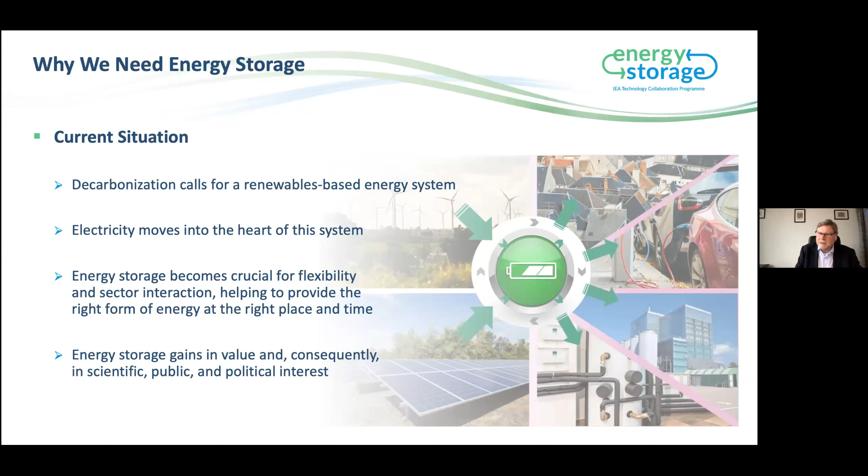We also see a higher level of interaction between the various sectors. We have to be sure that we place the right form of energy at the right place and time. Again, look at how heating and mobility have an impact on these changing profiles. And in this whole perspective, energy storage gains in value, economic value, but also value to make the overall energy system more reliable, more precise, and, let's say, safer in the future. And of course, these developments create public interest, also from a political point of view.

If you look at how these changes take shape, in the past, in the small circle where production and consumption were connected directly, if we needed more energy in whatever form, in our previous fossil fuel based energy system, we could just increase our production rate and tune that to the consumption.

With the introduction of renewables, decentral and central, there's a whole new spectrum. We have wind, hydro, large solar, bioenergy, all these renewable energy forms, and what we call prosumerfication: producing renewables at the same location where you can use them, but maybe not at the same time. So energy storage takes shape. And of course, there's a lot of data involved in order to connect these, and it works within a new and intelligent grid environment.

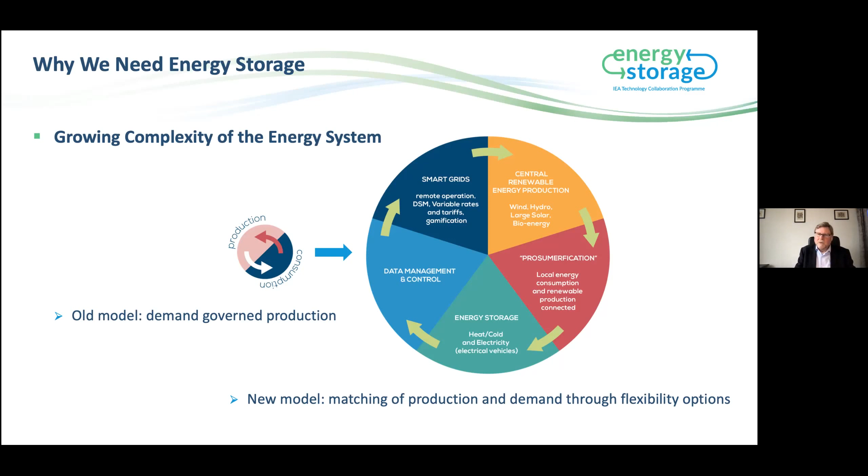These changes in the energy system require a totally new approach to make steps forward, and require far more flexibility. So from an old model where we have a constant supply meeting the various demand profiles, we change to a fluctuating supply from renewable sources. And at the same time, when we also have changes in our demand profiles, storage and flexibility become extremely important in order to balance the whole system and to make sure that we provide energy at the right time, at the right place, in the right shape and in the right capacity. These kinds of changes definitely will not be possible without more flexibility and more energy storage.

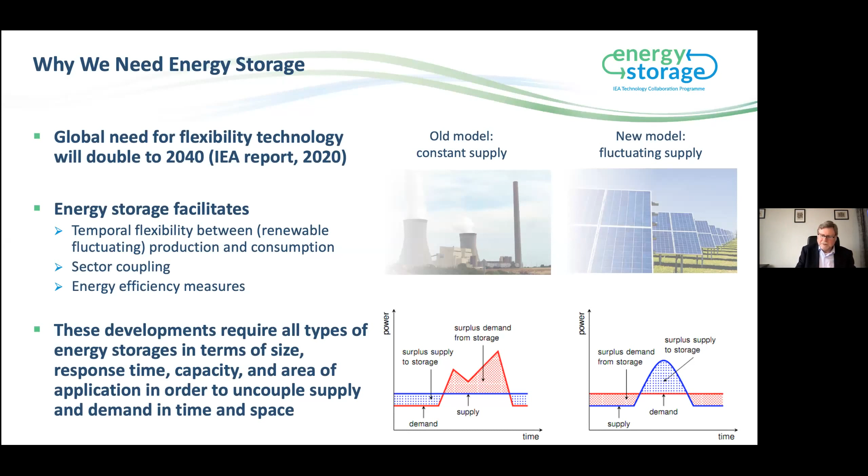I mentioned already the interaction between the sectors. That is a very important element now if you look at the entire system. It is not one-to-one that we can provide energy to a certain application, like mobility or like heating or like industrial process energy. We see far more interdependency occurring between fossil fuels replaced by renewables, where, for instance, electricity can be used both for mobility or for heating or for your normal electricity production or consumption in the industry or in your home.

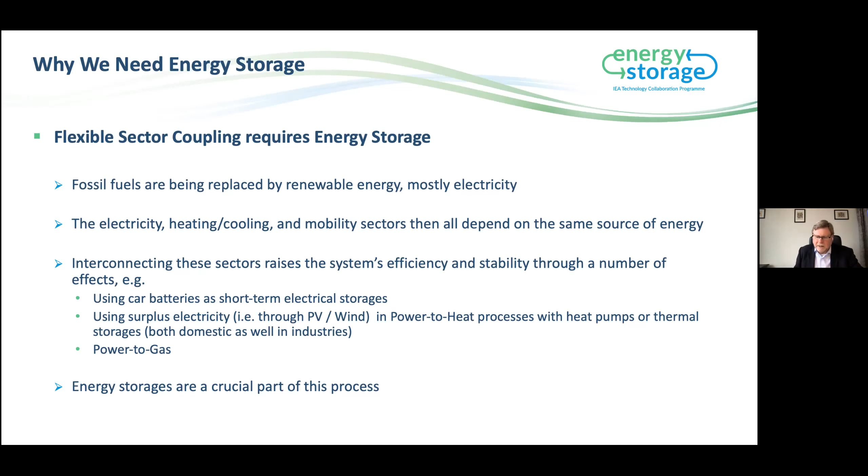At the same time, we can produce locally. All these various changes and the coupling of the various demand sectors requires energy storage as an intermediate enabling technology in order to meet these changing load profiles in the various sectors. And that's why energy storage becomes a very crucial part in any new process.

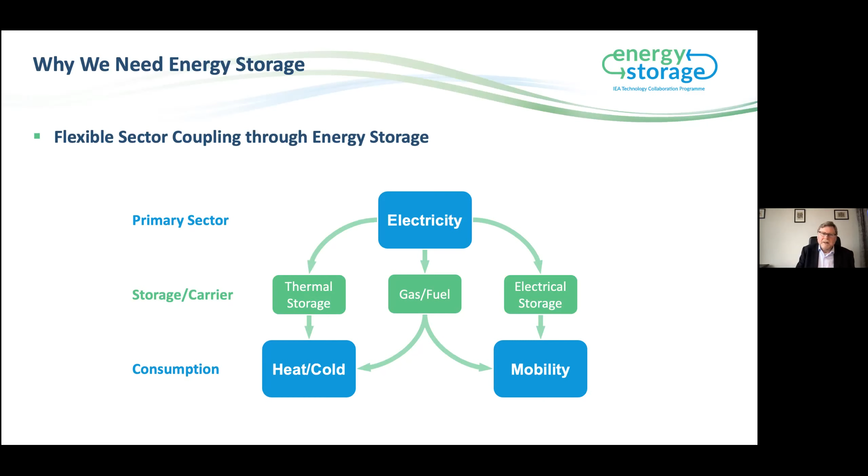So basically, the flexible sector coupling with storage requires that electricity, if we see that as the main commodity for a lot of the new processes, can go through either thermal storage and then be used for heat and cold, or directly, of course. And the same goes for mobility. And gas fuel from electricity, the so-called power to molecules or power to gas route, may also be supporting the consumption patterns in mobility and heat and cold. This is just an example how this can develop and need energy storage as an intermediate technology to make that happen.

Finally, the politics and the policy needed to encourage the use of storage is also internationally growing. There is an understanding which hasn't been there for a long period that energy storage is and needs to be taken into account in order to make the transition to a new energy system based on renewables. That is an important consideration, because if the politics and the regulation connected to the politics don't take that into account, we still see that the value of energy storage will be too limited.

And that brings us to the point that economics are very important. The economic value of energy storage depends, of course, on the application it's being used in, but it is definitely increasing at the moment. For instance, if you want to produce more variable renewables and bring that to your consumer profiles, you can do that by increasing your electricity infrastructure, or by avoiding that through the use of storage. It is a very economically interesting aspect.

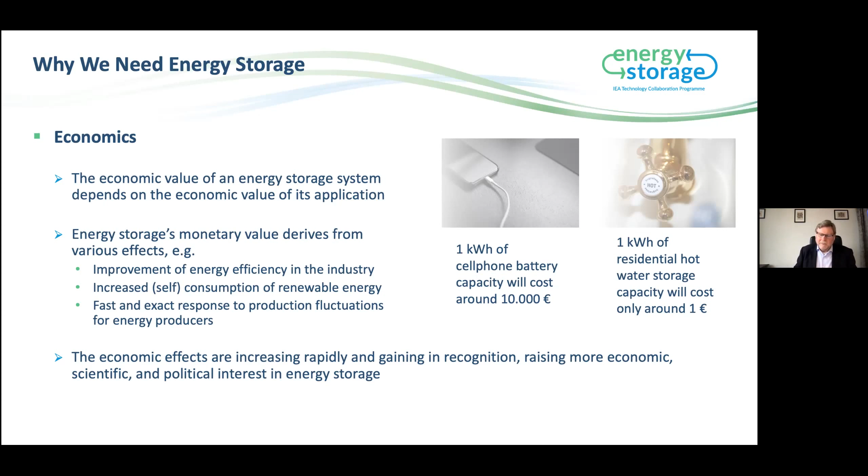Well, if we look at the essentials of energy storage, storage is just a very basic charging, storing, discharging cycle. A process where we include the time parameter into the direct normal production to consumer level. By introducing storage, you can change the time frame of the production to the load. That is the essence of storage. And charging and discharging in a certain cycle is a major part of the storage principles.

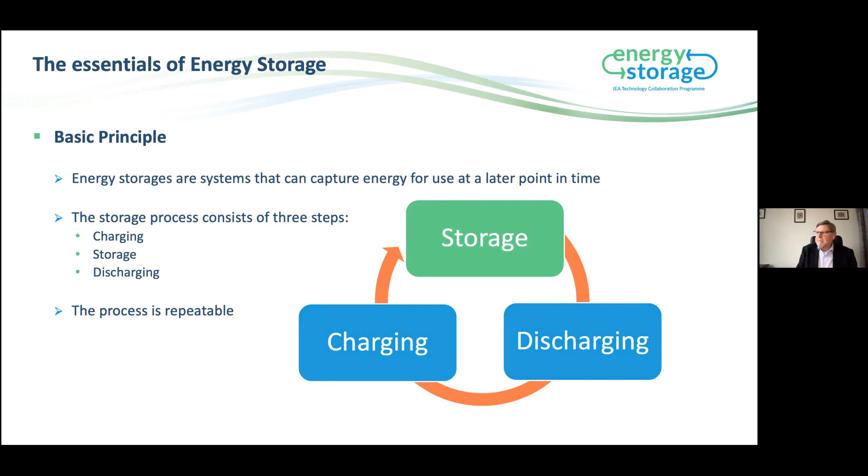So you have to look also, with storage, at the physical parameters. There's a need for storage in many forms, in many shapes. In terms of the capacity, what do you actually require? What is the time span in using the storage? Is that a year? Is that a second? Or is that a month? Or an hour? Or a day? That fully depends on the kind of application, and also on the kind of commodity you'd like to store. The desired charging and discharging capacity, how fast it should go, should be fine-tuned to the certain load you want to achieve.

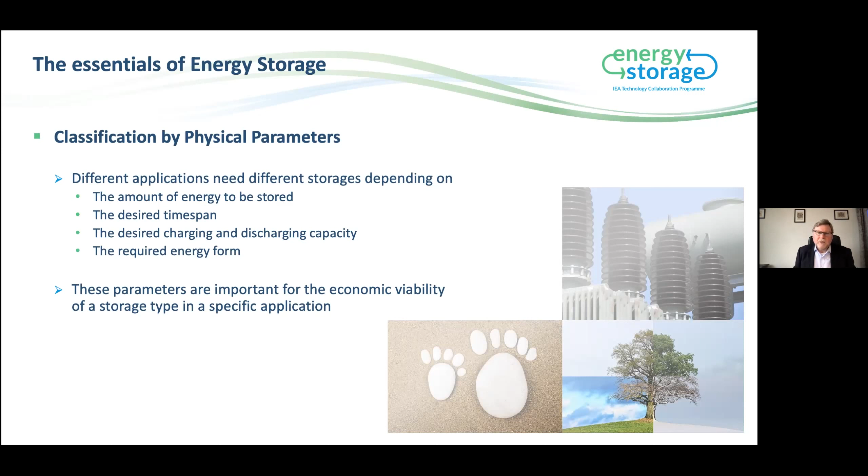And it has, of course, the dependency: what do you want to store? Is it electricity? Is it molecules produced by renewables? Or is it heat or cold in any form? Basically, fine-tuning the storage dimensions and parameters to your application defines the way you can actually see how storage will develop.

If you look at the classification of storage, we basically distinguish three categories. There is power to power, and basically there's all the electrical and mechanical storages you can do, and they can be in various forms and shapes. You have batteries of all kinds and sorts, we have flywheels, and there's compressed air. There's a lot of applications connected to the power to power way of using storage.

On the other side of the spectrum, we see heat and cold as a storage medium. We basically distinguish between sensible, latent, and thermochemical heat or cold. And it can also be done in all kinds of forms. It can be water, solids, liquids, molten salts, or PCMs. There's a lot of various shapes of energy storage.

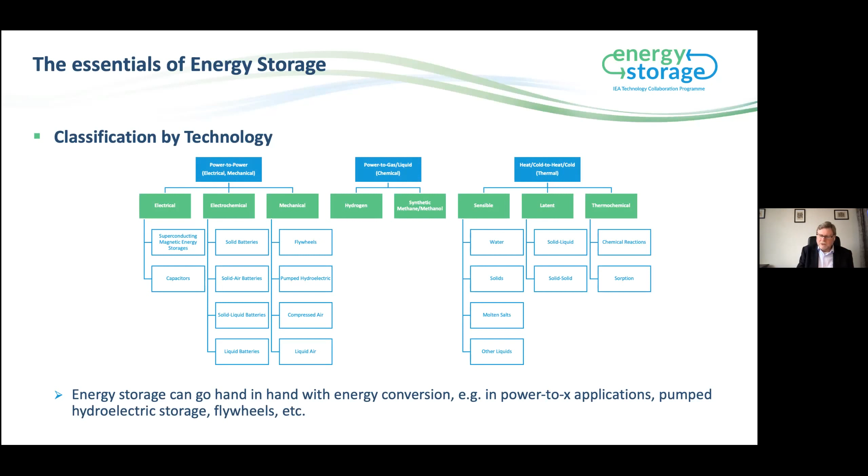And of course, the power to gas route, where we basically transfer electricity to hydrogen or power to gas. That is also one of the elements we can use energy storage for in other uses and applications. So if you want to compare it, thermal is of course a relatively inexpensive way to store energy. We've seen it used for centuries in many ways and shapes in buildings and industry, from passive storages in buildings, used already by the old civilizations, to very new and innovative forms of thermochemical energy storage, thermal energy storage.

It has a very low access rate to the consumer, which I think is very important. With regard to chemical storages, of course, it is super because it has a high energy density, like fossil fuels also have a huge energy density. It can basically be stored for a long term and can be transported, which is important. But you have to understand also that if you want to produce these chemicals by renewables, it is a fairly expensive form of storing energy, but it can be used in applications where we don't see any alternatives, like aviation or shipping or other applications.

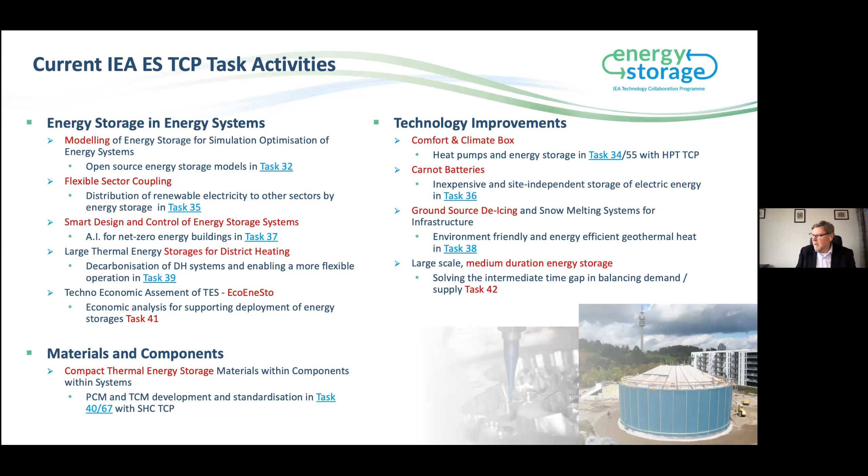Or we work on Carnot batteries, a very inexpensive and site-independent storage for electrical energy. We also look in the task at ground source de-icing, on how we can use the energy storage in the underground for de-icing purposes in northern climate countries. And of course, we will start a new task on medium duration energy storage. There's a lot of work being done on the long term or on the short term, but the medium term is an important area we need to focus on and concentrate on.

Apart from our technical work, we also organize a scientific conference, the ENERSTOCK conference, we do every 3 years. There will be an intermediate online version starting in 2023, which is good to have an update on all the scientific work being done within and outside the scope of the Energy Storage TCP. We have started the initiative to create an energy storage database for people to find the right information and documentation of successful storage systems and applications. We'll launch this later in this year.

And of course, we continue to promote a scientific exchange through experts and knowledge by webinars, symposia, and these kind of activities we see today with this online seminar.

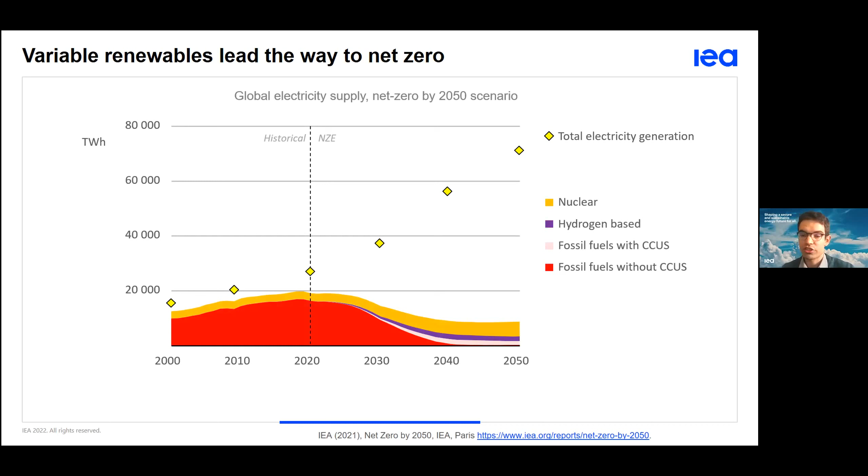It's getting replaced by fossil fuels with carbon capture, hydrogen-based solutions, nuclear, but most importantly, 90% of electricity generation in 2050 is propelled by renewables: hydro, other renewables, solar PV and wind. Solar PV and wind especially contribute nearly 70% of total electricity supply at the global level in 2050. So this means a lot of variability in the supply.

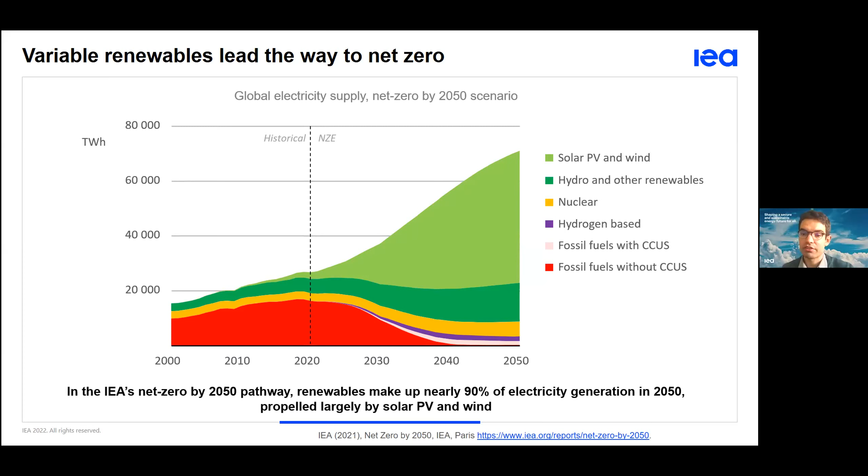New challenges are emerging from this decarbonization trend. And we can see this by doing a deep dive on, for example, G7 countries, but the same could apply to many, many countries in the world, where the share today of solar PV and wind variable renewables typically ranges from 6% to 30%. It means that we are still in the first phases of renewable integration, from phase 1, system integration being not a relevant issue with a very low share of variable renewables, to phase 3, which would be that we need some flexibility investments, but that are affordable in different measures.

But as we are moving towards 2030, 40, and 50 in the IEA's net zero emissions by 2050 scenario, the growing share of solar PV and wind makes us reach the following phases. By 2030, all countries in the G7 reach phase 4, which requires advanced technologies to accommodate for this variability in supply and in demand. And by 2050, all countries are either in phase 5 or in phase 6, where we need to ensure energy security, even with frequent periods of wind and solar PV that are exceeding demand or are falling short of meeting the demand depending on weather conditions and other parameters that influence their production.

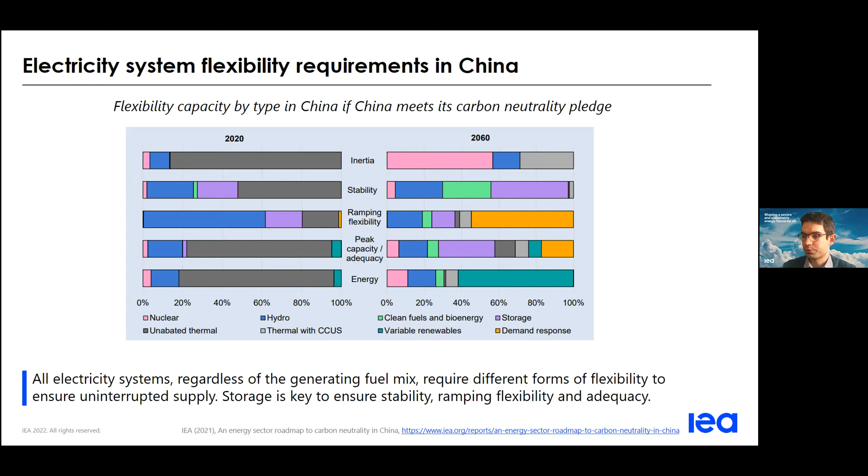We also have a need for enhanced stability and ramping flexibility. That is the ability of the power system and the demand system to adjust very rapidly to changes in variable renewable output or to changes in demand below the minute, for example, or below the hour, depending on the situation. That is to say that we have a variety of energy balancing challenges, not only depending on the time horizons, but also depending on the nature of the service that needs to be provided, whether it's heat, whether it's electricity, whether it's gas, as Teun mentioned before. And this requires a diversity of storage solutions.

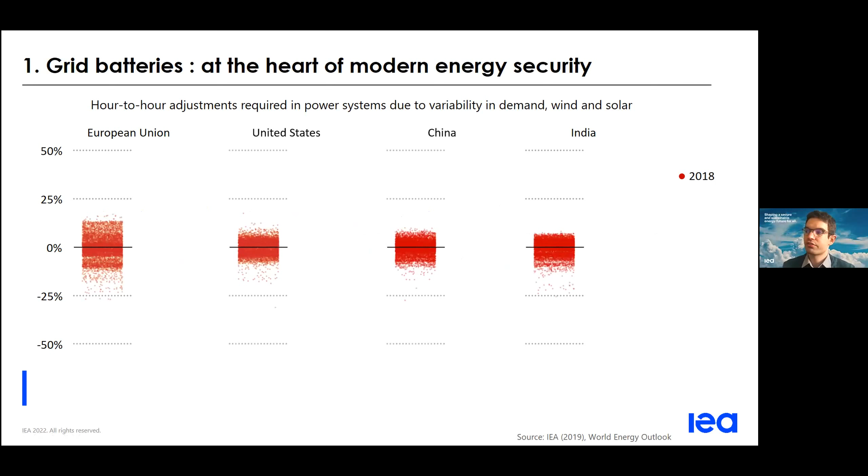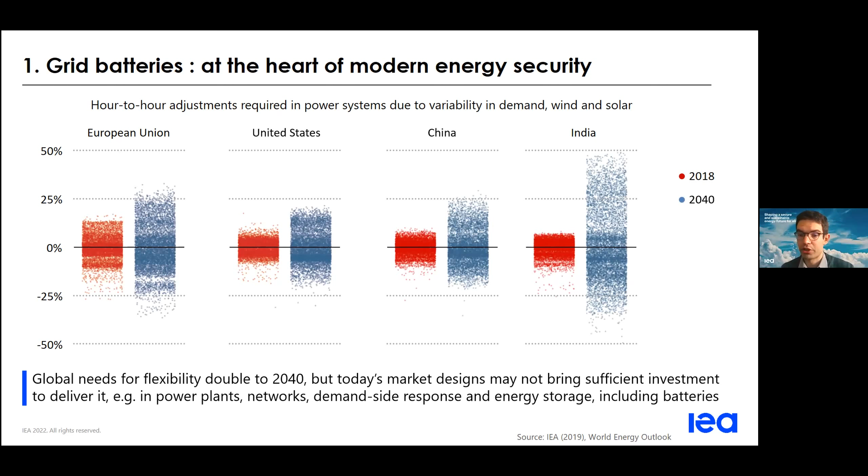The first that come to mind is, of course, grid batteries, which are at the heart of modern energy security. Here you have a picture of the hour-to-hour adjustment needs in the power systems due to the variability in supply. So you can see here in 2018, two examples from the European Union and India, where we have an hour-to-hour adjustment of 20% and 10% upwards. And if we keep adding this to have a picture of the recent trends, we can see that this adjustment is contained between plus or minus 15% from one hour to the other. But as we move to the future, to 2040, with increasing share of variable renewables, we see that this range is expanding quickly and especially exceeding plus or minus 25%. So this means new capacities, new storage capacities to actually accommodate for this variability.

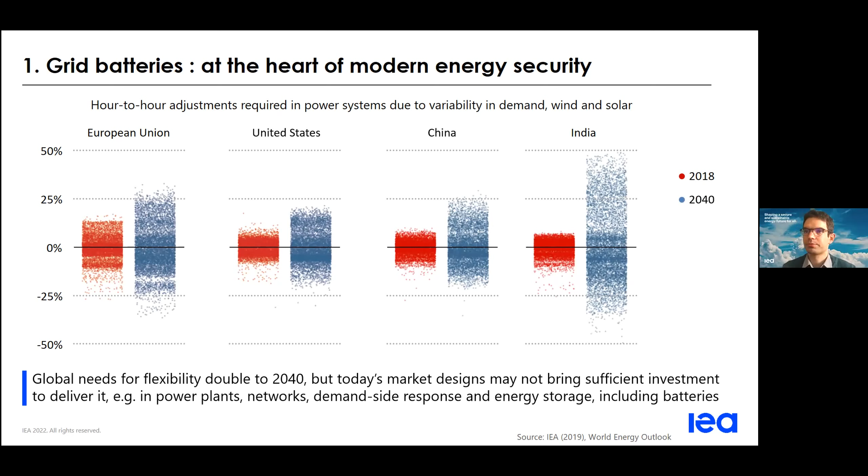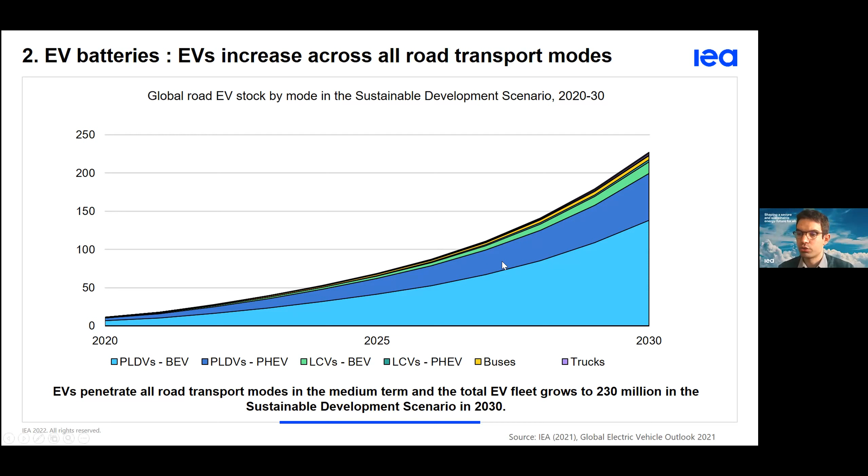But the question is, we try to quantify how much of this flexibility potential could actually be used, and what would be the implications on the energy system. Does it really make a difference or not? And for this, we tried to analyze what's the peak capacity and what's the off-peak capacity requirements in different regions in 2030 with an EV deployment corresponding to the one we had in the sustainable development scenario. So we have a big gap between the off-peak capacity needs and the peak capacity needs, which needs to be addressed through storage or through additional capacity that will just be used for 10% of the time.

But with the EV fleet and assuming a relatively good participation rate, we see that we can almost completely offset this gap between off-peak capacity requirements and peak capacity requirements, as EVs through vehicle to grid, so discharging electricity to the grid, could unlock 600 gigawatts of flexible capacity distributed across the main EV markets.

600 gigawatts, it's absolutely enormous. It represents nearly half of the current hydropower capacity today. Not all of this will certainly be tapped into. That's really the upper potential. But it's just to say that there is an underlying big storage capacity in the EV fleet, which governments and different industries could really look into to mitigate the increase of electricity system costs as they accommodate more renewables.

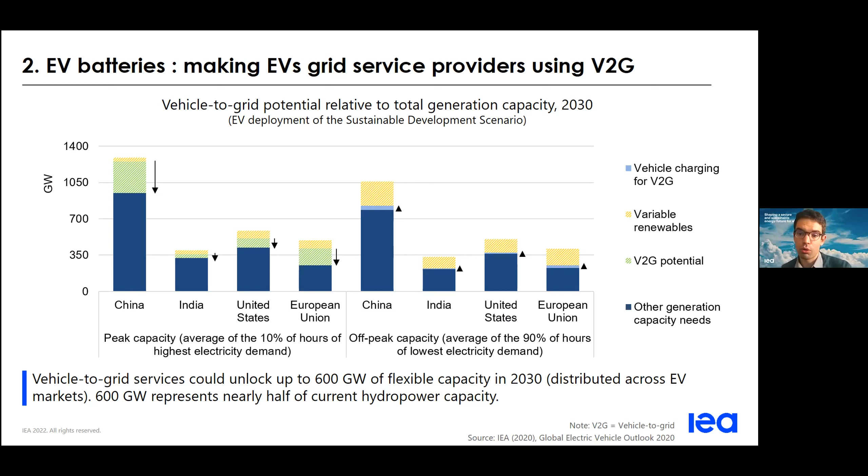And of course, vehicle to grid is not the only way for EVs to provide flexibility. We have also smart charging or delayed charging through time of use tariffs, for example. Another opportunity is the growth of hydrogen, so storing energy through hydrogen. There are two ways of providing flexibility. One way would be to run electrolyzers, which would, for example, absorb the excess of variable renewables to produce hydrogen, which would then be stored and used later.

And we see that the strong growth in hydrogen demand, especially in heavy industry for steelmaking, but also for long distance transport with ammonia for shipping or synthetic fuels for aviation, could contribute to make this profitable. It would also contribute to reduce the cost of hydrogen production, as we can imagine that in the future, during periods in which we have an excess of variable generation, the cost of electricity will be cheaper.

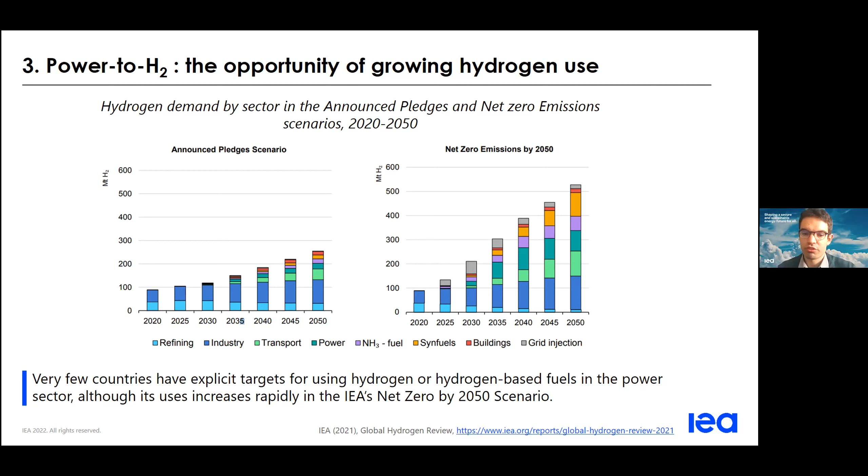So this is one opportunity, and the other is, of course, to invest in fuel cells that would produce electricity in a flexible manner to be able to meet, for example, peak demand or provide other services. In the interest of time, I'm going to move to the fourth mega trend we're seeing at the IEA, which is thermal storage. Why thermal storage? It's because thermal demand is set to drive the peak load.

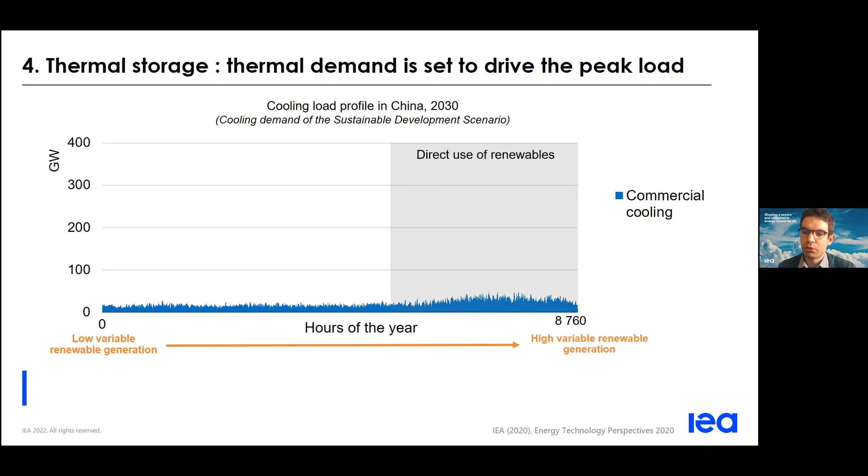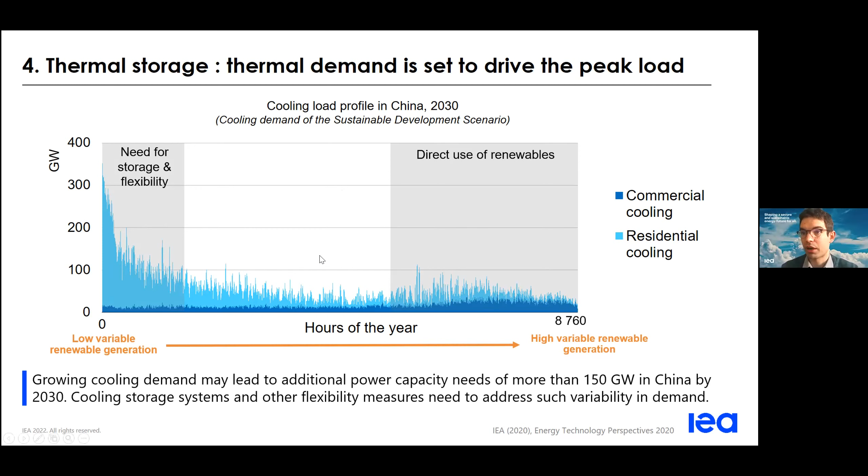And there is a business opportunity to, of course, have a kind of thermal storage that would displace this extra capacity requirement to other time periods where we'll have some renewable capacity in the grid. And this is a big deal, because this is the example taken from China in 2030, and it could displace as much as 150 gigawatts of power. Thermal storage is not only about cooling, it's also about heating, of course.

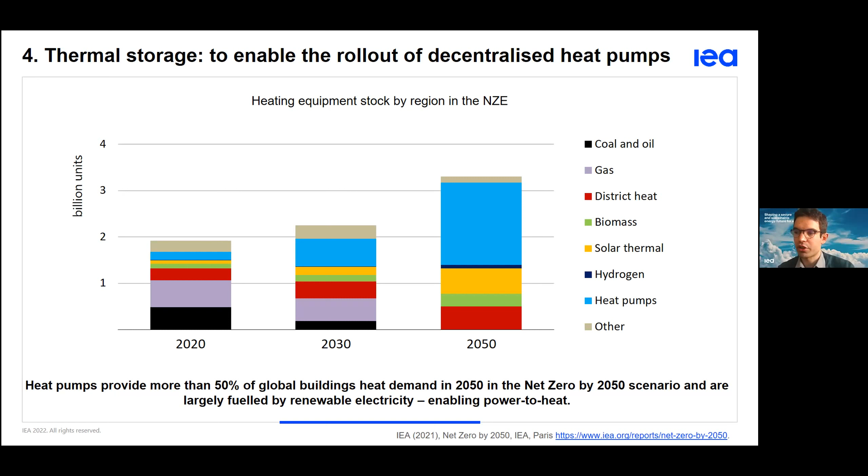And to deploy heat pumps in different buildings, including in old buildings that are generally the least performers, we need to find advanced solutions to mitigate the impact of the heat pumps on the peak load through, for example, the integration of heat batteries in a compact and affordable product for the end user. Finally, we have power to heat through community-based systems, for example, through district energy. And we realized that the expansion of district energy could benefit from the expansion of renewables.

The first reason is that thermal storage at the scale of a district is much more efficient, of course, because we can distribute and be connected to more buildings and more households and offices, but it could also absorb some renewables that could be generated during a certain period of time and stored. This energy could be stored in the form of heat in different districts, and therefore it could contribute to the integration of variable renewables while being decarbonized.

Because today more than 90% of all district heating is produced by fossil fuels. And so through this means, this would not only allow a larger share of renewables in the mix, but also allow the decarbonization of district energy systems.

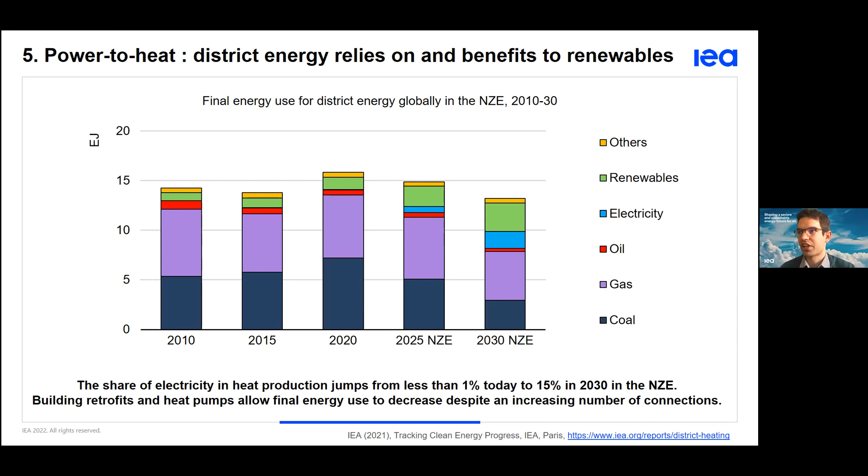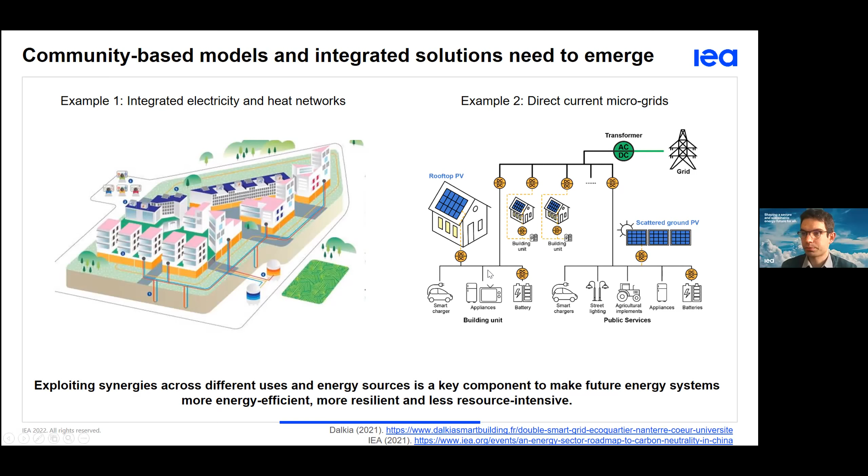So in conclusion, the share of variable renewables in the electricity mix at net zero emissions increases dramatically. We reach 70% at the global level, and at the country level, it's generally between 50 and 75%. It raises many challenges, and so we need to use the diversity of storage solutions to be able to meet all those challenges. And the use of energy storage technologies enables a more efficient use of resources and lowers the total system costs, and especially avoids investments in the upgrade of the electricity infrastructure.

And last, integrated networks, for example, interconnected thermal and electric grids are essential to leverage the widest diversity of solutions at disposal, all of them being connected to a single district, for example.